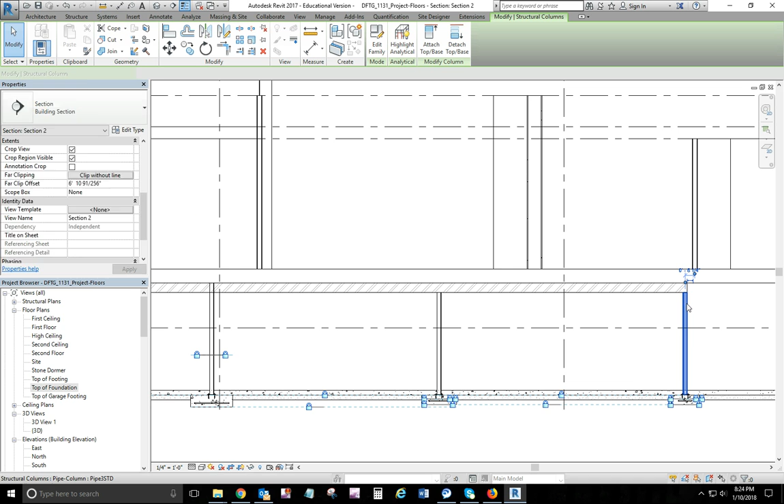One thing you will have to do is shorten your three columns across here. This 8 and 9/32 is the height of this particular beam. Okay, so I'm giving that to you.

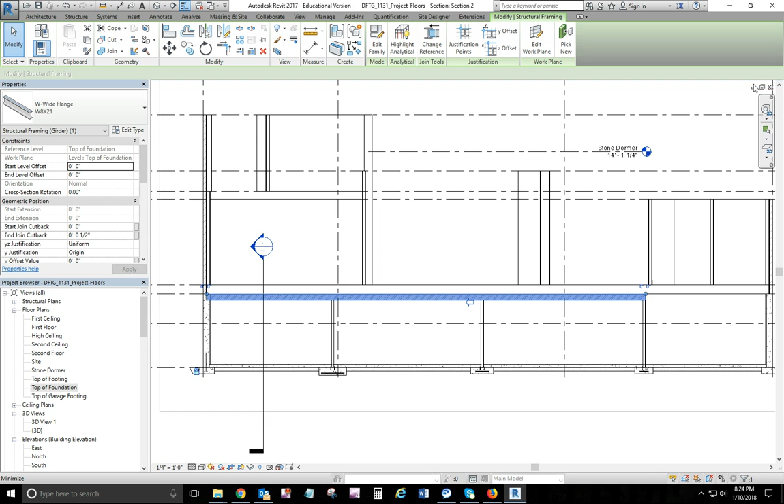But when you're drawing these, let me go back to the top foundation plan. That's where we're putting it, because the top of the beam is level with the top of the foundation. Okay, so you go structure beam.

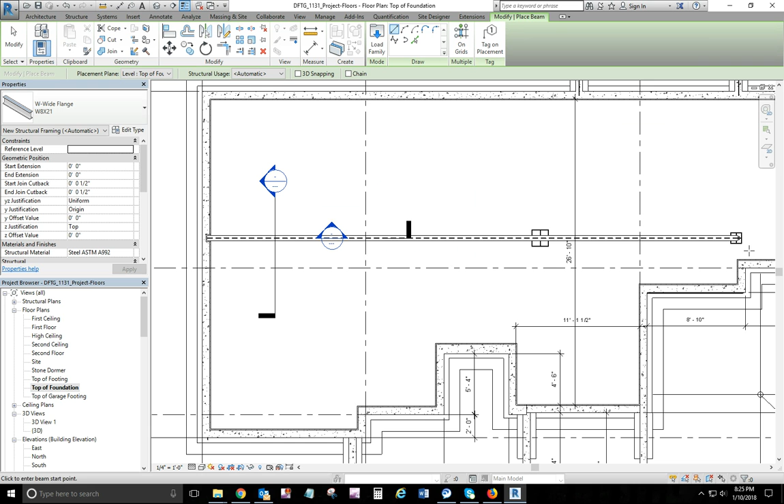You'll have to load these. This one is an 8 by 21. It doesn't matter if you start it on the left and drag it to the right, doesn't matter. You're going to drag it out, but it actually goes over the edge of the pipe column, doesn't stop in the middle. So when you draw it, you're going to have to come back in an elevation or in a section view and kind of edit it.

In the same way here on this end, you want it to stick into the wall about 3 to 4 inches, and you'll create a beam pocket or a void there.

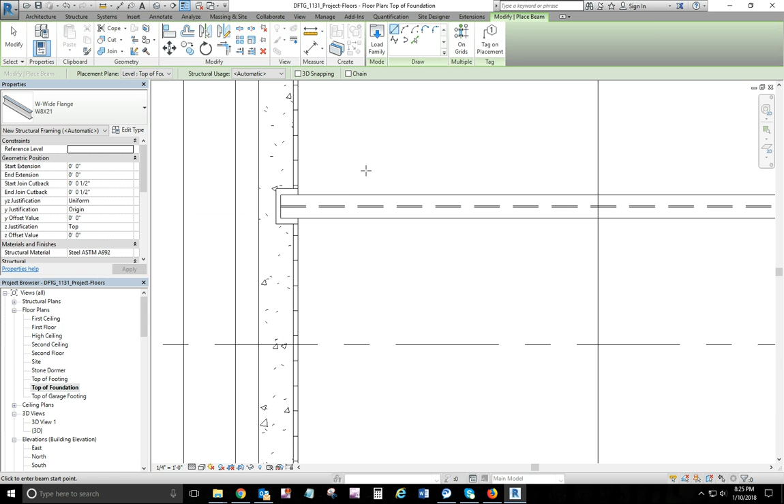So let me show you how I did that. I need two views open: the plan view and a section view. Sorry about that, my phone rang and I don't know who would be calling me at 8:30 at night in the office.

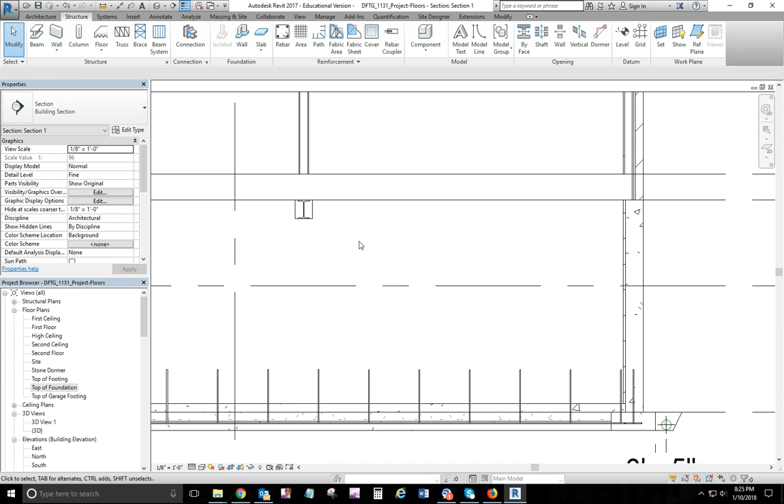Anyway, okay, so I got my two views open. I'm going to start with this view here and we'll go component, model in place. And parameters, I'm just putting this under structural framing.

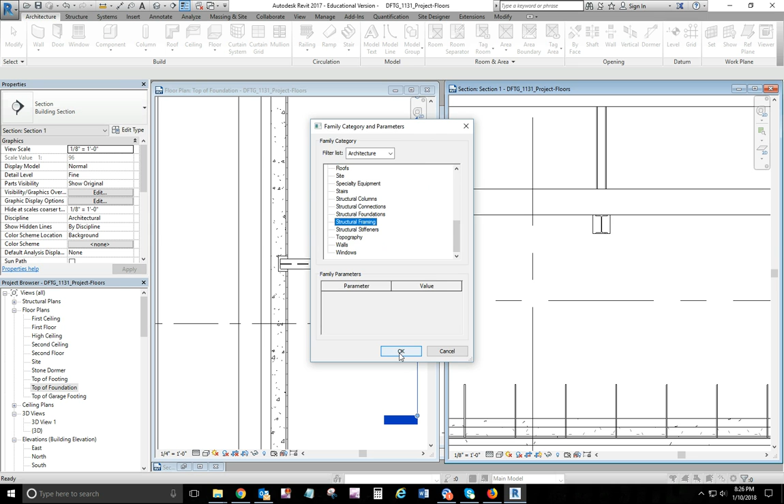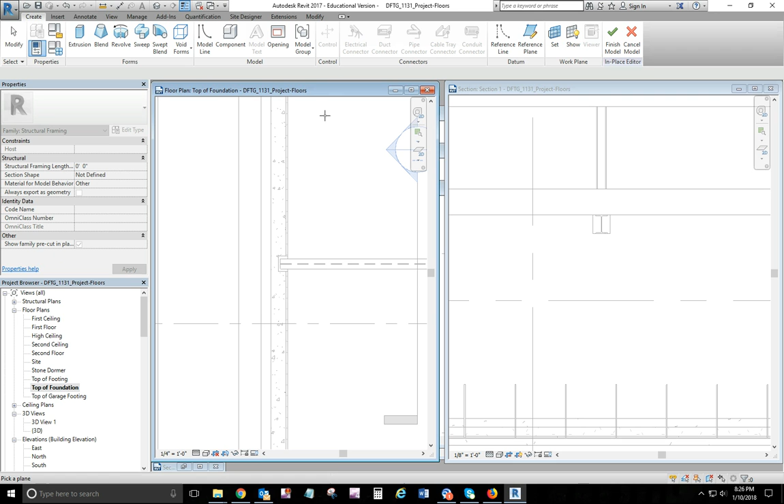I called it beam pocket 1 when I did it the first time, so I'm going to call it beam pocket 2 here. And we're going to do a void form, void extrusion, and picking a plane. I'm going to draw it on that plane there, but I'm going to work in section number 1.

Okay, so you're going to draw a rectangle. This beam is 8 and 9/32 of an inch tall, but it's 5 and 9/32 of an inch wide. The beam pocket needs to have a little room to wiggle the beam around, so I made it 8 inches wide.

But I dimensioned it to the center of the beam. So you would dimension center of the beam, that gets it located. There's no need for me to do that. Then I dimensioned the height of it as being the height of the beam, 8 and 9/32. In reality it'd be a little larger than the beam, and then they would put shims and grout up under it, but we're going to model it this way. So you get it sized, dimensioned, and locked down.

Then you come up here and you click your - oh wait, we got to change the depth of it here. And we want it to go 5 inches deep. That'll put us through the insulation and halfway into the concrete wall. I think the 5 will work good on that.

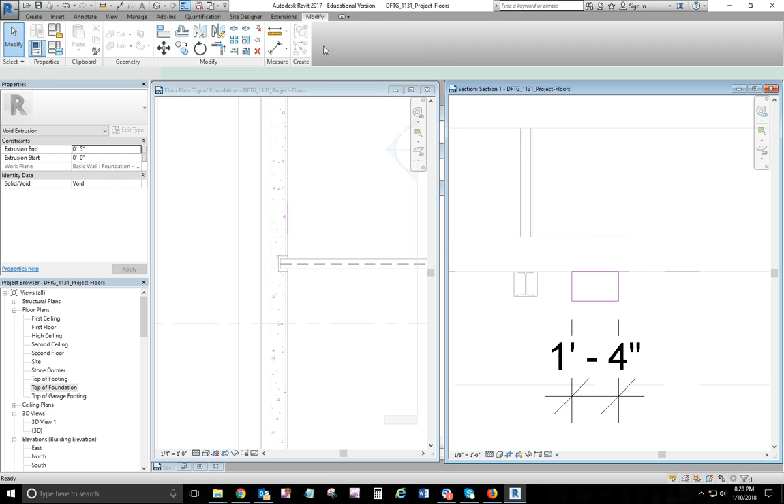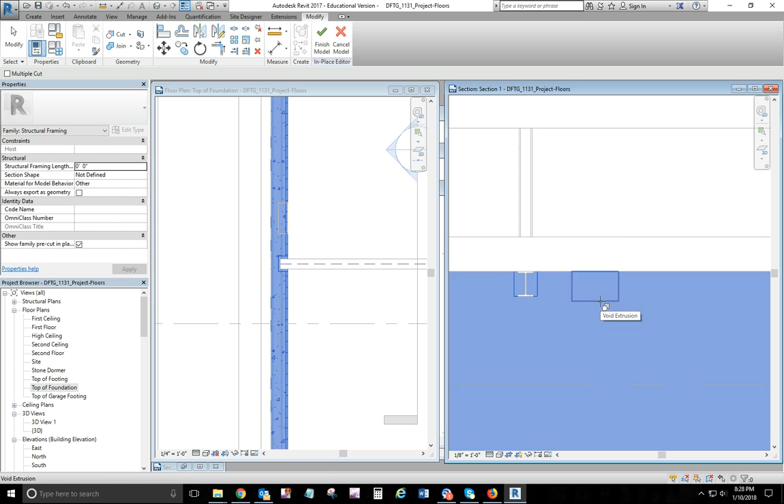So we'll finish the edit, and you can see it shows up here, okay, in my wall. Before I do anything else, now I want to do a cut, and I'm going to choose cut geometry. I'm going to choose this wall as what I'm going to cut, and then come back over here and choose that profile as what I'm going to cut out, and then go finish model. And then it creates a pocket in the wall there, a void, if you will.

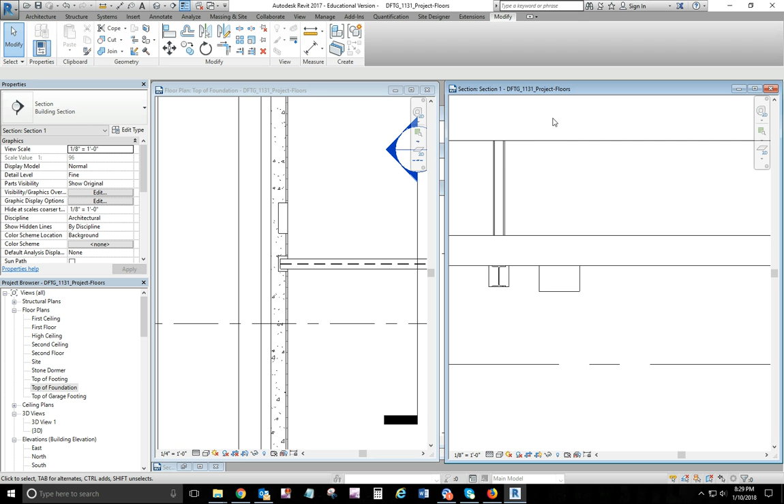Okay, I tried it all, doing it all in one view, and I kept getting error messages with circular references and just all kinds of stuff. So I think this working from two different views, a plan view and a section view, is what works out great for that. Okay, so I'm going to take that one back out.

All right, but now once you get that beam in, there is another beam that goes across this portion right down here. It's an 8 by 15. And so there's a beam pocket right here and a beam pocket here. So go ahead and load that beam in and put it in place, and then you can see what size it is, and you can create those beam pockets for that. And then we'll come back and deal with the floor systems.